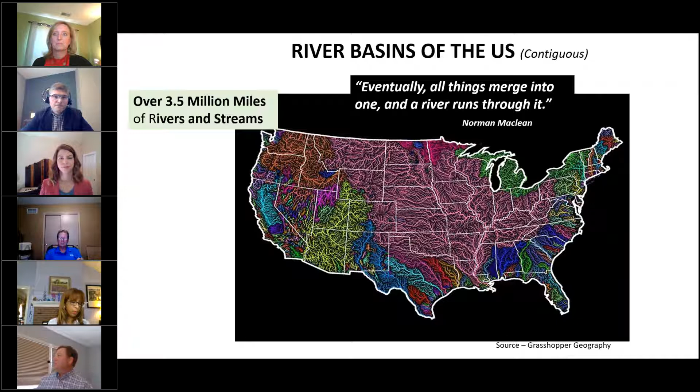And I want you to think about that in terms of that watershed basin map. How much can we actually expect to be accomplished? And now, that's not to ignore that there are good stewardship activities. Certainly a lot of land is federal land.

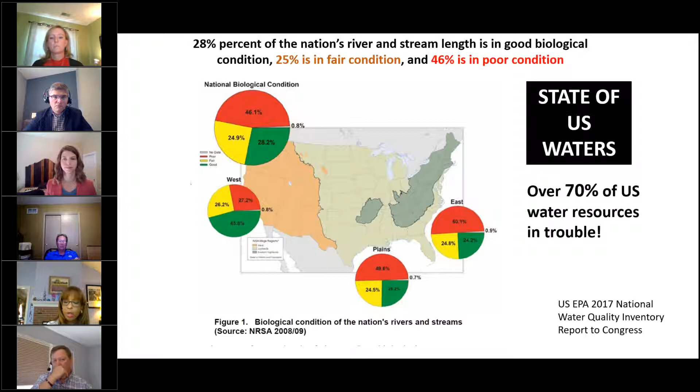It's limiting to public right-of-way. We're just not going to get there, and in fact we aren't getting there. This was one of the last reports to Congress, 2017, on the status of our nation's water quality. You can see 25% in fair condition, which means highly threatened, and 46% in poor condition. That's over 70% of our water resources in trouble, with increasing threats every day.

We were talking before the webcast - I mentioned hurricanes because I track them, given my family's down in South Louisiana. Of course, no surprise, we're already past the expected rate, an unprecedented rate of intense tropical depressions and hurricanes. In fact, over 24 tropical depressions, 23 major named storms, 8 major hurricanes, and they continue. October and November are projected to be significantly higher in terms of temperature than normal.

And then, of course, the devastating effects of these wildfires out west. Just reading about it is heartbreaking - hundreds of thousands of acres gone, lives gone, animals, habitat, people. An entire town I just read about Sunday in California had to evacuate. And with this comes all the secondary and tertiary impacts of smoke and carcinogens, and certainly water - whether it's a need for more water or contaminated water.

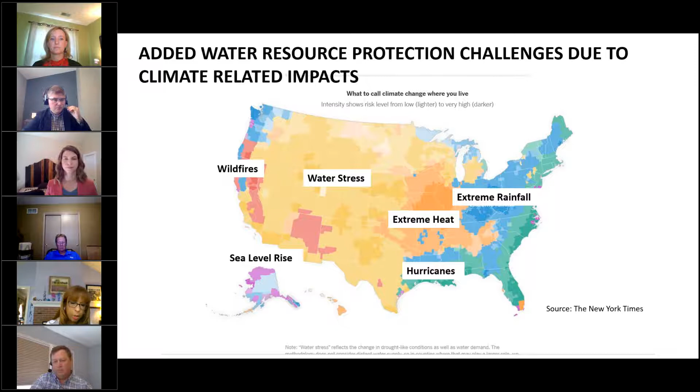And all of this in the age of COVID, which is actually now mutating. Of course, I know everyone's aware we're projected to have an increase in the flu season. So the challenges are endless, and I really wanted to bring the picture of the significance of what we're talking about, as many of us are focused on all water resources and the balance of a sustainable community.

That is compounded by rising stormwater needs and an ever-expanding funding gap. Those of us who have been champions in the stormwater realm for many years see it as the pivotal connector, whether you're talking about reducing CSOs, supporting source water, et cetera. It really still has not been funded to the degree it needs to be nationally, state, local, and that's why we all have to help figure this out.

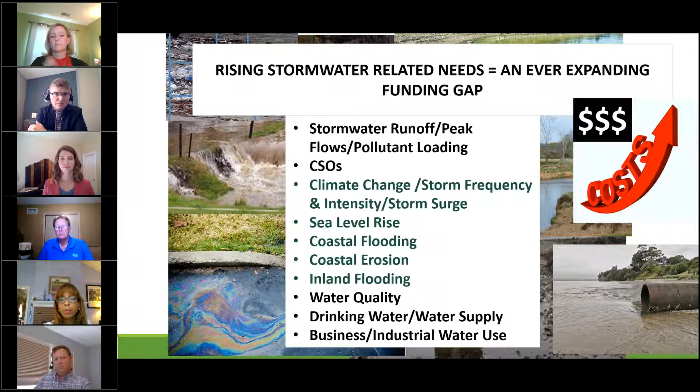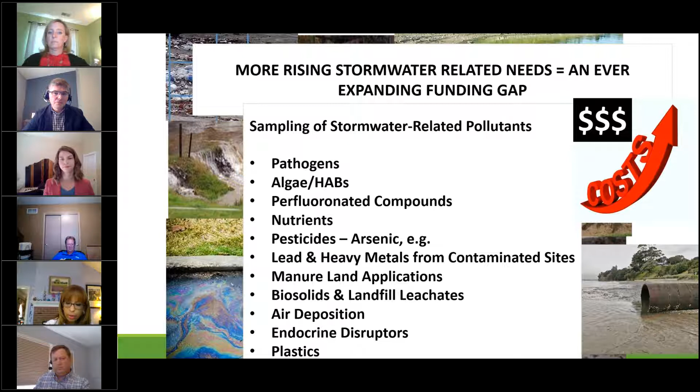So these are just a summary of the impacts and interrelationship in terms of runoff and other areas, and the increasing list of pollutants - from pathogens, and now we know COVID, algae has significant impacts across the country. PFAS, certainly seeing it not only in contaminated fields but in groundwater, surface water, nutrients and pesticides, heavy metals, manure, land applications, biosolids, air deposition, endocrine disruptors, pharmaceuticals, plastics - we're seeing more and more plastics.

It becomes a bit overwhelming in terms of how exactly we're really going to get somewhere in turning back the impacts on our receiving streams and water resources. Just to put this in the regulatory context - 150 billion, and I'm sure it's actually more than that in terms of stormwater wet weather needs. We've got 7,500 or so MS4s, phase 1s and 2s, and 772 combined sewer systems in the US.

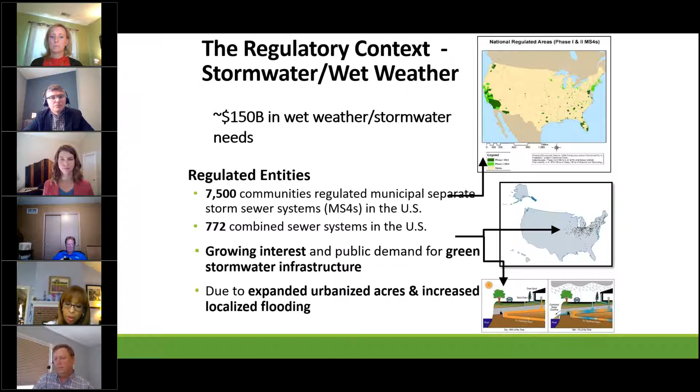Remember that backdrop and that original water basins map I mentioned. Of course, we're all aware, as we're going to be talking about in this webcast, how important it's been to make the transition from impervious to pervious, from traditional stormwater - which essentially means slope development, flash floods, everything scouring the streams out - to captured, infiltrate or filtrate, capture, treat, store, reuse, and green infrastructure. The wonderful thing is, having been there before people knew what green infrastructure was, part of an effort with EPA to promote green infrastructure, we're starting to see these incredible technologies combining to get greater efficiencies.

And you'll be excited to hear more about that later.

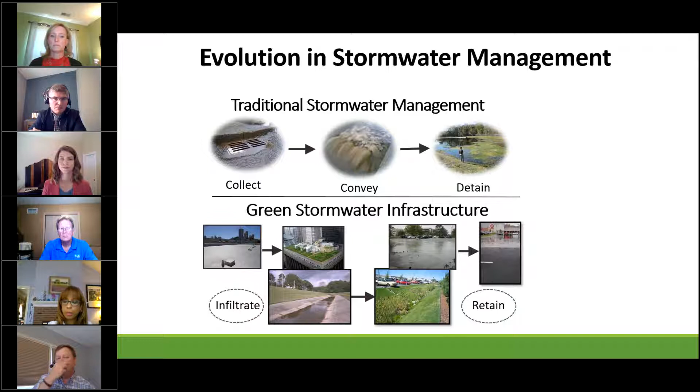We mentioned community-based P3s, and I'm convinced, as a career public servant who ran local environmental programs, that if we only focus within public right-of-way, and even to the degree we could address some private land, which is very limited, we're not going to get anywhere.

We need to look at public-private partnerships, but we also need to have them be very place-based. That is what gets the level of acceptance, that is the value proposition. Importantly, we need to figure out how to do more with less. We don't have it, we've seen public monies are diminishing, and major needs for ratepayers and taxpayers have gone up. In fact, on the water treatment side, it's not even there, because many treatment facilities and utilities have not had the resources to constantly survey and determine how the needs really have gone up, but they don't match the rates.

So this effort was not only about alternative financing and innovative partnerships, but how can we look at technologies and drive innovative green technologies? How can we create incentives through our regulatory approaches? That would also include credits and offsets. How do we expedite large-scale delivery, performance, and capacity of green stormwater infrastructure because of all the additional benefits, including air quality and local jobs? And big on this is O&M, because local governments have not really been able to invest in O&M, certainly not even monitoring. So it's exciting to hear about these real-time technologies and these types of partnership approaches that help to address it.

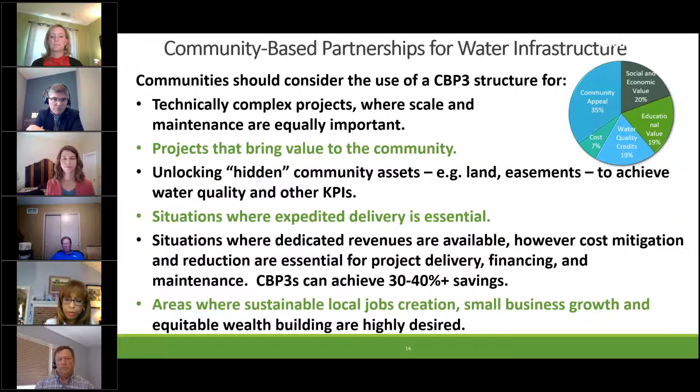And in that corner, you can see from the existing CBP3s, and I'll continue to commend what's going on in Prince George's County. We're excited about Chester and Salinas and a number of other places, Milwaukee, others that are coming on board with their own place-based approach, which makes it exciting because it's new every time it takes on the form of that geographic location and the values to those communities and resources. But being able to integrate schools and knowledge-based training around this and build a future workforce.

This can be done - many folks have thought, because it's called the CBP3, that it relies on P3 legislation. No, actually a number of those out there are using procurement for that government entity. You don't have to have P3 legislation. You do have to be very clear up front on goals, performance goals. And you'll hear about the pilot in Maryland and the importance of setting the right parameters, realizing you're likely not going to get it perfect, but setting those parameters and creating an overall management scheme to get it done.

So now on to utilizing performance-based partnerships for smart communities and smart stormwater. Just a little bit of an intro to the discussion today. We're now using this word smart. To me, smart is how you figured out how to do something better and more cost effective with greater results.

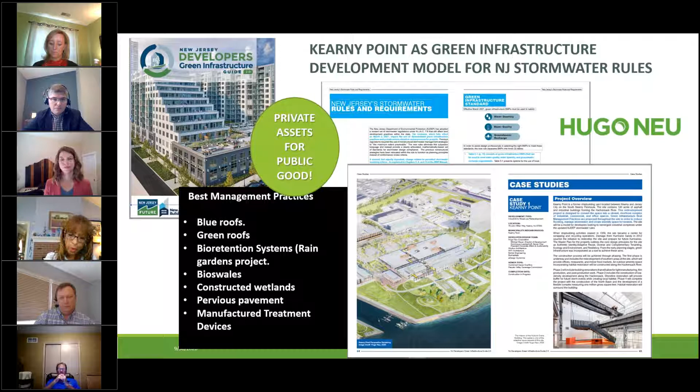We're also doing a mix of renewable energy and promoting emerging technologies that support energy, water, and food resilience. We just completed design on a green street. This is definitely private assets for public good because we don't own the street, but we're featuring elements that we think could create a model for other communities—streets are for people too—and featuring a lot of green infrastructure.

This leads into the next discussion, what we call high performance partnerships—this one focused on ponds. I'm going to tell the Wisconsin guys they have a high performance pavement partnership, and I think we hope to see this sort of smart BMPs and smart green infrastructure examples across the country. I know there's a lot of effort going on, including current community-based P3s that have Clean Water Partnerships accessing private land for some time, and now understanding continually how to do it smarter and better, where it's easier for all the key entities to participate.

It's my pleasure to say that this was one of the last projects I worked on before leaving EPA, and I want to commend EPA, MDE, and Maryland DOT, pivotal partners who agreed this was a necessary thing—and Walmart, who was willing to put up its assets, because we were looking for universal application if we were going to pilot it. How could we do it so it could transfer more universally? DOT has facilities all over the state, so does Walmart. So I want to thank everyone, and I'm so pleased that it got off the ground.

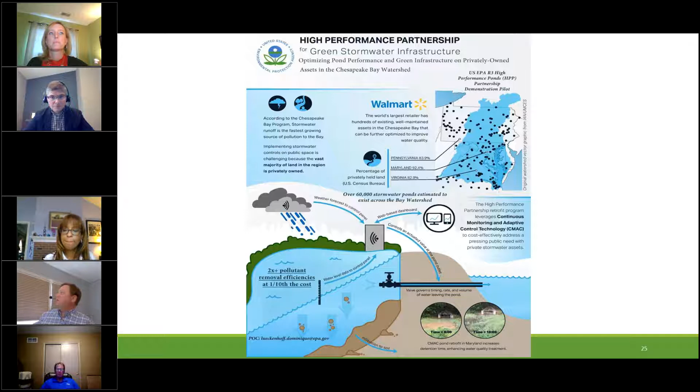Before going on to that, Dom, I just wanted to reiterate, it's a great overview of everything, and it's just the tip of the iceberg of all the information and all the work that has been done that you led while you were at EPA, and things have grown since that time. So thank you for sharing that.

This is the kind of information that NMSA will have in the CBP3 Center of Excellence that Dominique will be chairing, and I'll be working with her as the director for that. Through the grant from Chesapeake Bay Trust, we will be providing technical assistance to communities and other types of products over the next 3 to 6 months. So be on the lookout for that.

Dom, a quick question, and then we'll transition to the panel discussion. It might be a quick question, but not a long answer. So you sure you want me to? It's up to you, you can defer if you want to. It's a long question, actually, but we'll see. So maybe it's a long question, then it'll be a short answer. Maybe Tony can answer for me, or Sandy. All right, go ahead, I'm sorry, Seth.

The question is, how do the projects relate to stormwater management that is required for development and redevelopment? Do the public-private partnership elements need to be above and beyond requirements? That's not a quick answer.

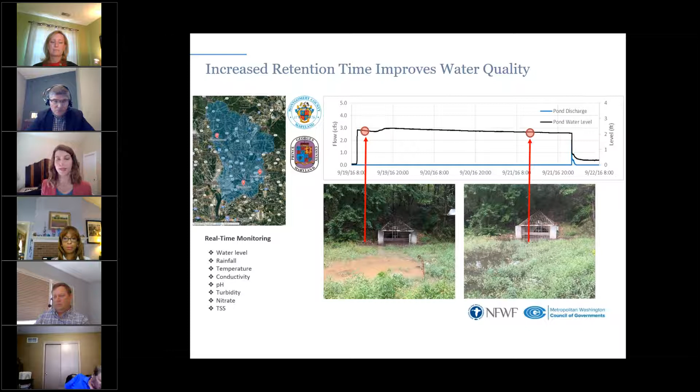And so I want to take a moment, and I'm so glad that Sandy and I both had this slide in our presentations, because I can't overstate how much I appreciate what that partnership role really looks like.

Because if Walmart had just come in and said, hey, we want to do something, that's all great. Yay, Walmart, you're trying to do something, or whoever the big box or private entity is. But how do you actually get that off of the ground?

And so this structure, although we know it's not going to look like this everywhere, really enabled us to take the Maryland project and get it off the ground. We could actually move and have the momentum that we needed to test out what works, what doesn't work, and start that feedback loop.

I have to second what Dom said about having those ambassadors, those cheerleaders for this project. My previous boss, Rich Daly, who was really instrumental in getting this off the ground and in pushing us towards this, he was a cheerleader. He was a proponent all the way around.

And if we didn't have those cheerleaders within each of these partnership organizations, I can honestly say I don't think we would be where we are today, with actual construction completed and moving forward towards construction on the two other sites. Those cheerleaders are just pivotal, because this isn't always a quick process.

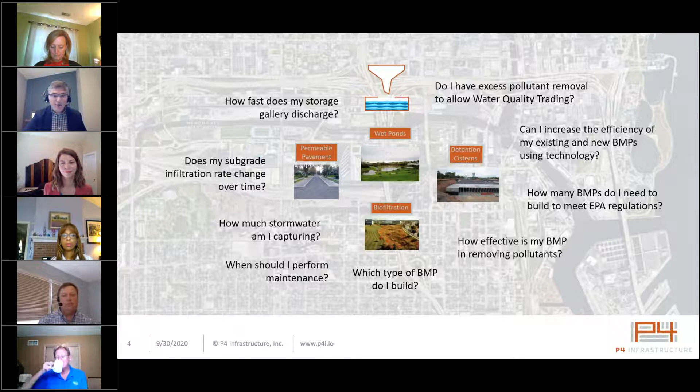These are questions that keep coming up over and over and over, and it's really the only way you can start answering them is by collecting data and measuring how these things are working. So to answer the questions, we developed InfilTracker and FlowRTC.

These are our IoT systems, and they include a rainfall measurement system we call RainMX, a water level or level measuring system called InfilTracker, and an optional smart valve system we call FlowRTC. All of the systems are battery powered, solar charged, and wirelessly connected to the cloud.

They can be installed pretty easily with readily available equipment, typically housed within a DPW staff or typical rental equipment. The installation you see on this screen was at Cudahy City Hall. It happened in January of this year, and the DPW actually did the installation themselves with minimal oversight by personnel from P4. These systems are applicable to all BMPs. We just happen to be showing permeable pavement today, but it definitely applies to all BMPs.

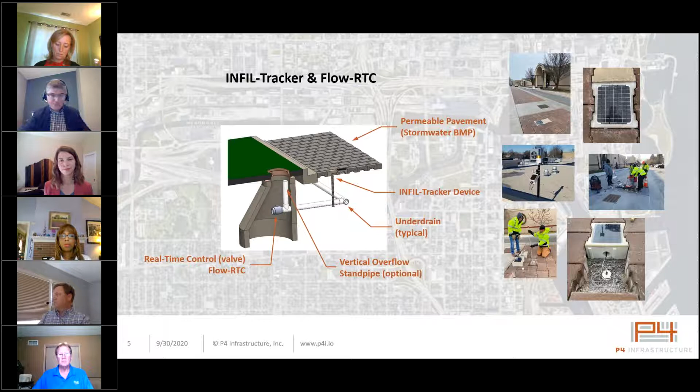After the InfilTracker and FlowRTC systems are in place, we can begin answering questions like, what happens if the amount of water assumed to be running off and funneled to the BMP is not what we expected during the design process? What is actually used for the rainfall? What are the runoff coefficients? How was the land use source area determined?

What if you could determine for a given rain event the amount of water that actually makes it to the BMP? What if you could hold water in the BMP as long as possible to promote infiltration and increase residence time before letting the water exit through the underdrain, and do it without any risk of the system not draining? This is the value of real-time monitoring and real-time controls on the outlets.

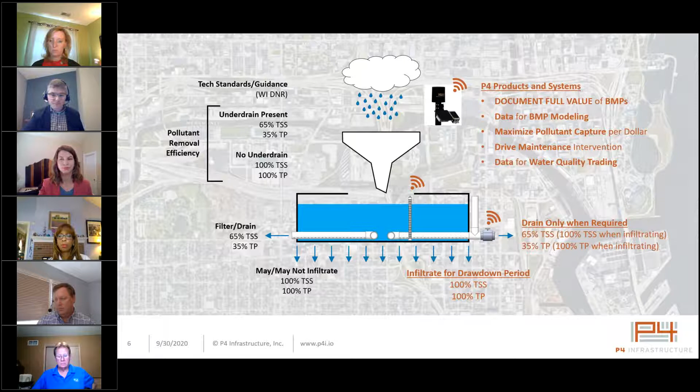After the no controls analysis, BMPs get added to the model. BMPs either retain, filter, or infiltrate stormwater, which reduces the amount of pollutant making it to the outfall. Adding a BMP does not change the amount of stormwater volume making it to junction 1, but could, and usually does, change the volume at junction 2.

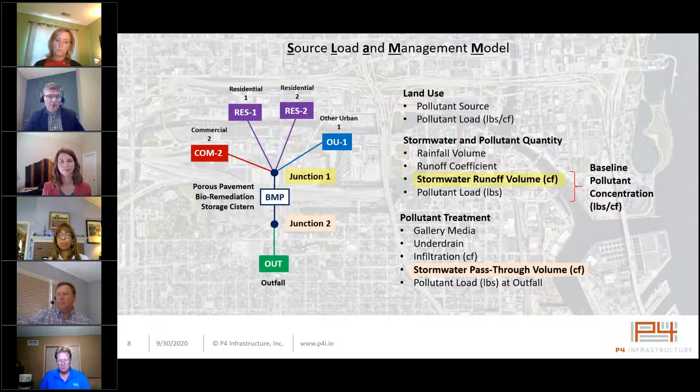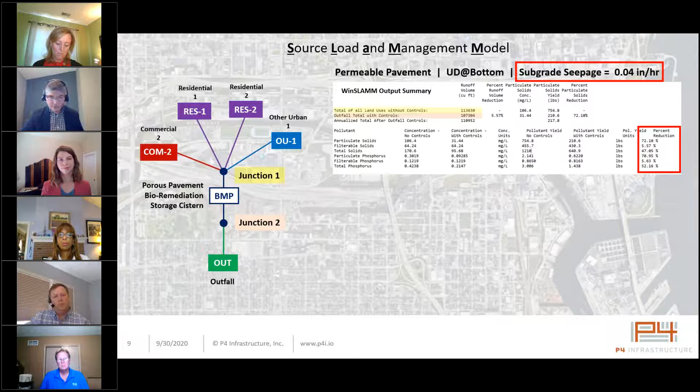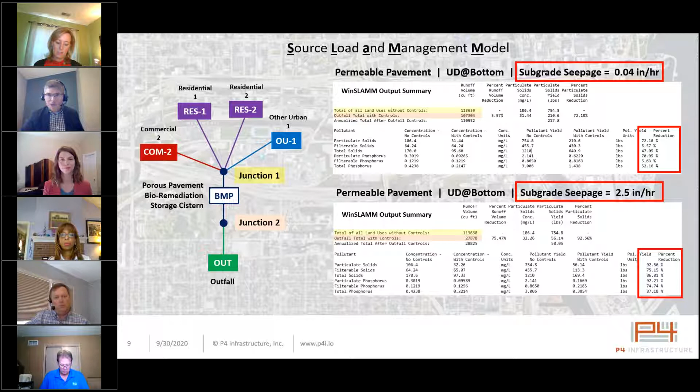The junction volumes are shown on the left in yellow and orange highlights, and the BMP performance is shown in terms of percent reduction from baseline values, shown on the right in the red box. When the infiltration rate, essentially subgrade seepage rate, is much higher than assumed, let's say instead of 0.04 inches per hour, it's something closer to 2.5, which is actually very close to what we're measuring out in the field, you can see it's pretty clear when you look at those percent reductions how much more you're able to remove with the increased infiltration.

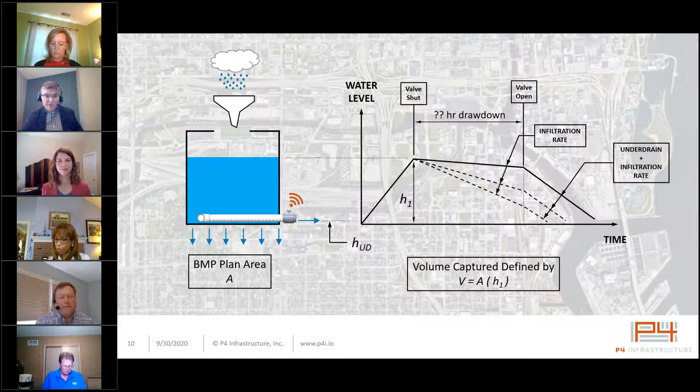So this is the behavior of the BMP with Flow RTC. You're able to promote infiltration and pollutant removal at the highest efficiency for as long as possible. If it doesn't drain within the drawdown period required, the system will autonomously drain itself by opening the valve. The volume of water that's infiltrated and the volume discharged are documented continuously, and we can correlate volume measured in the BMP to rainfall intensity and duration continuously, and adjust the pollutant concentration and removal accordingly. This is how we maximize BMP efficiency and make sure the communities with these BMPs are getting the credit they're due.

So the slight backup of 7 inches was all that was measured, when in reality this permeable pavement gallery is 37 inches deep. On July 22nd, we installed Flow RTC, which caps off the underdrain with a valve. The first significant rain event after the installation of that valve, a similar event of 2.14 inches in 24 hours, spiked the water level under the pavement up to 32 inches.

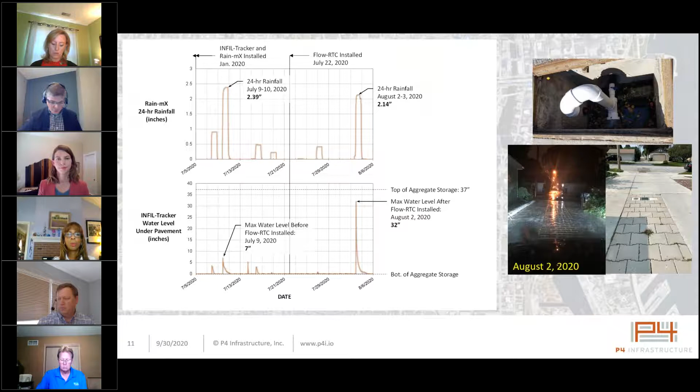So Todd, if you want to take it over and talk about some of the stuff you're doing in Cudahy with some systems. Sure, right.

So real briefly about me, I'm actually a professional landscape architect, which always seems to make engineers step back and gasp.

I've been practicing stormwater management and water resource engineering for well over 35 years, and have written copious amounts of municipal stormwater management plans, ranging from a couple pages long to volumes. I've got a tremendous amount of experience dealing with design issues and the concerns municipalities have in trying to achieve compliance with TMDLs and MS4 permits.

The one thing I've noticed throughout my career is that many communities across the nation are now faced with having to meet these compliance goals. They've all used similar tools to get there: an engineering plan filled with watershed delineations, hydraulics, hydrology, water quality calculations, and BMP toolboxes applied to meet these compliance goals.

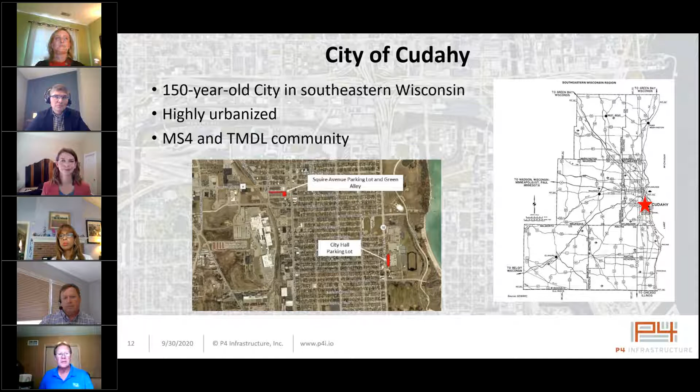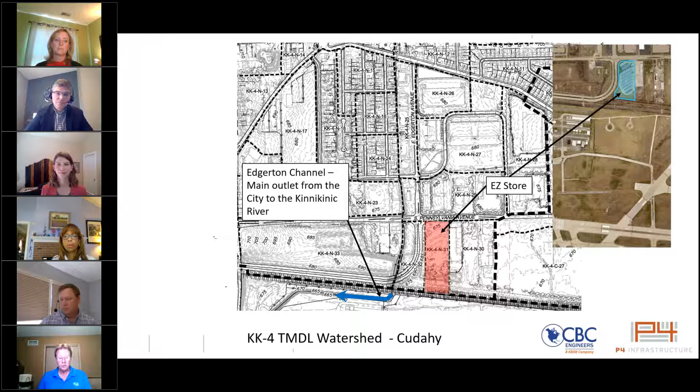So go ahead, Joe, flip it. So EZ Store, just kind of the unique design elements of it.

Because of the Milwaukee Metropolitan Sewerage District's stormwater runoff rules, this site could only discharge 2.8 CFS after a 100-year storm event. This is about an 8-acre site, and it's predominantly, as you can see, mostly impervious. So you can just imagine what kind of a facility you've got to design in order to drop that 100-year storm down to 2.8 CFS. I mean, it's basically a trickle.

So in discussing that issue with the owner, the decision was made to design the system to capture, store, and in this case, infiltrate up to a 100-year storm event. That's not something that's very common when you start talking green infrastructure, but in this case, it was a necessity.

Now, the original plan for this was to have a pond installed on the far left-hand side of the facility. Well, because they're next to General Mitchell Field, the FAA said we're not going to let you put it in there because we've got a lot of goose problems around here in Wisconsin, and that's not going to happen.

And then when we showed them that if we used green infrastructure, you'd actually get 12, 25 more storage units out of it, all of a sudden, obviously, his money button clicked on, and he realized that he could actually get a quicker payback because he wouldn't have used up that area as a pond. He's actually using it for revenue generation. So that's another benefit of this design, is that by installing those additional units, he was getting payback.

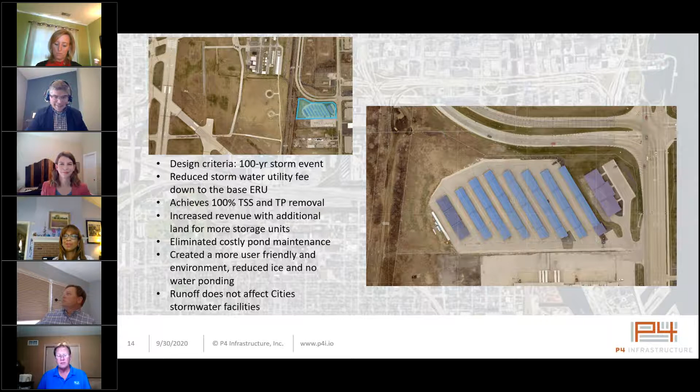So thanks, Todd. The question is, how does the city buy in, install these sensors to try to gain the additional efficiency they can out of their existing BMPs, or install sensors in new BMPs as they continue on their quest toward EPA compliance, or as they begin doing community-based P3s with an EZ Store. How do they look at a geographically distributed sensor network and incorporate the measured data into their EPA compliance strategy?

So I'm going to show basically how you would interface with data from your sensors, and then I'm going to go through how the data can be used in a compliance strategy.

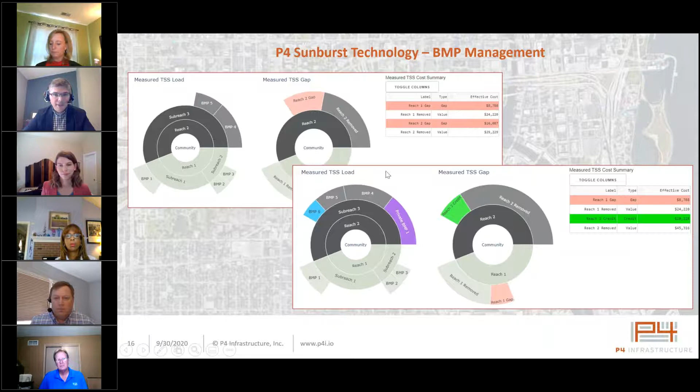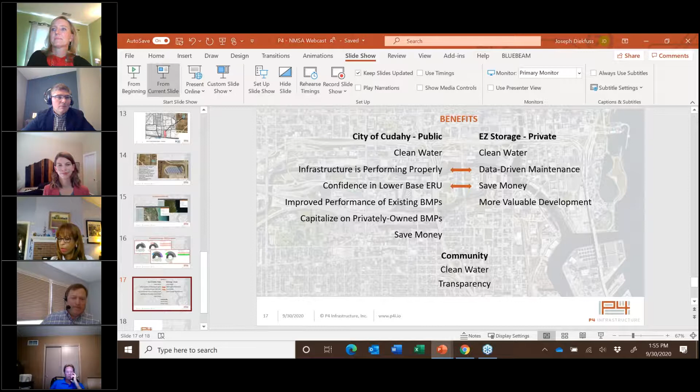Yeah, I'm here. Thank you, Seth. I'll be brief. I didn't prepare any slides, but just so everyone knows who I am, I'm Jacob Zimmerman, a stormwater engineer with Wisconsin Department of Natural Resources. I'm the stormwater sector lead for the Milwaukee River TMDL.

I think the key issue is that most municipalities are facing higher pollutant loads due to TMDLs, lack of available land to build new BMPs, maintenance concerns, and design considerations here specifically are clay and not very good soils for infiltration, and then the need to treat for dissolved nutrients, which are causing a lot of our water quality impairments, phosphorus and nitrogen.

When P4 initially brought this to us, I was really happy to hear that they were installing a system like this and trying to learn specifically how their BMPs that are already installed are working. Because as Todd mentioned earlier, we do have very conservative design assumptions and standards for 100-year storms, things like that. We want to know that these systems will work and provide the treatment removal that we need. But at the same time, there is some information you can't collect pre-design, so you have to use conservative assumptions.

Installing a system like they proposed allows you to really understand what is the infiltrative capacity of these considered tight clay soils. If it's a lot better than we're assuming, you should be able to get credit for things like that. Unfortunately, no one from Cudahy is here, but I wanted to say I give them a lot of accolades for being the first one to install these and to try to pilot this.